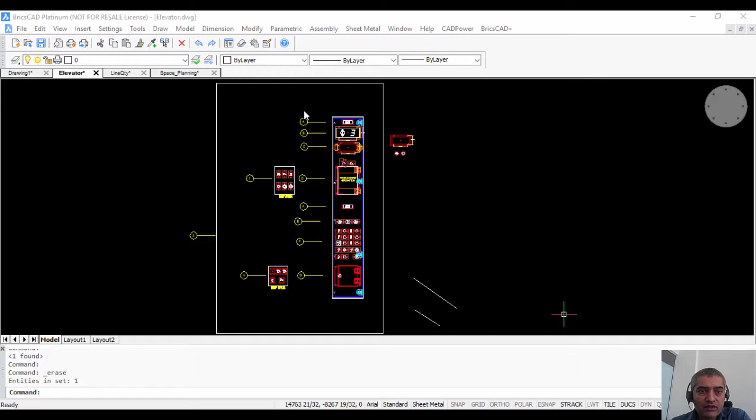In this CAD Power video, I'm going to give you a brief overview of the quantity takeoff tools in CAD Power. We are going to show you 3 drawings in which different workflows are presented. First, in this Elevator drawing, you can see there are a number of blocks, and we are going to create a cost and quantity table out of these blocks.

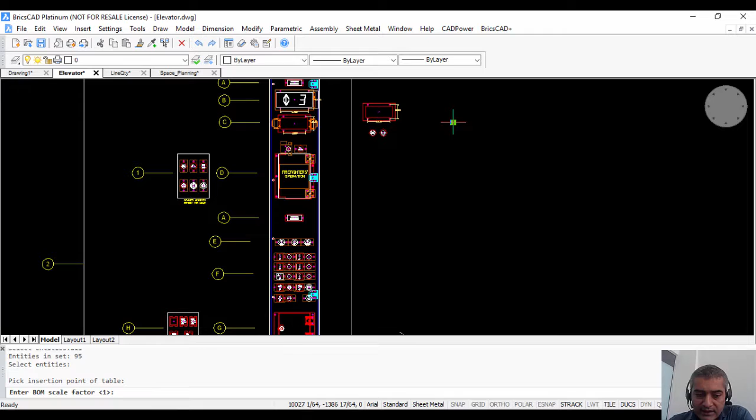So we go to CAD Power, BOM, BOM/BOQ tools, BOM generator. The BOQ type is already set as multiple blocks by name, and the block names have been set, the cost has been set. So I click OK, select all the blocks, pick a point for the BOQ table. I enter the scale as 25, and you can see that the BOQ table has been created now.

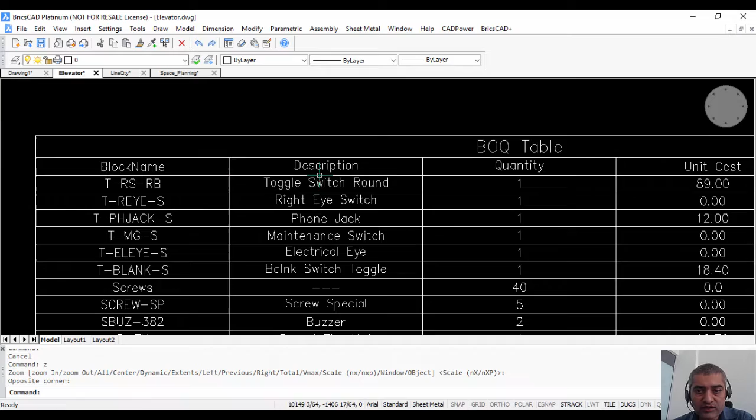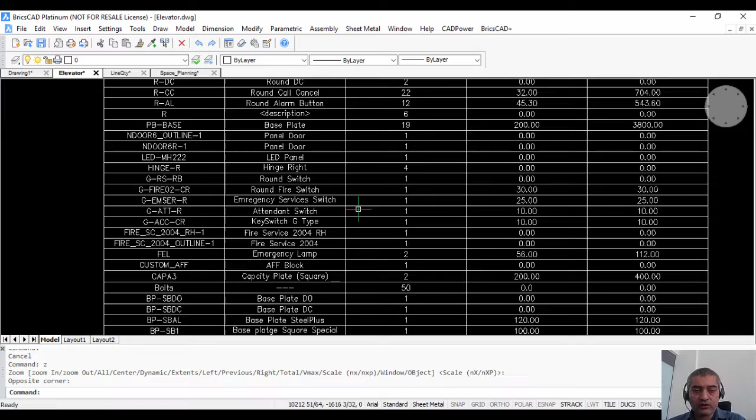So you can see that the BOQ table has got the block name, description, quantity, unit cost and total cost. So this is one way how you can create your quantity table from your CAD drawing. So you need to have blocks which have distinct identifiable names, and then you can set identifiable descriptions.

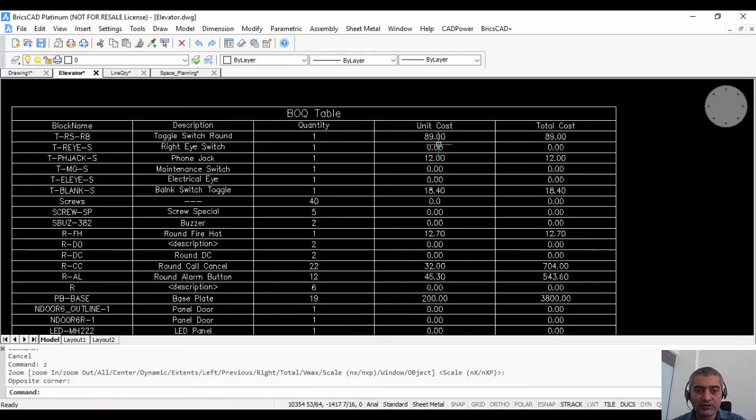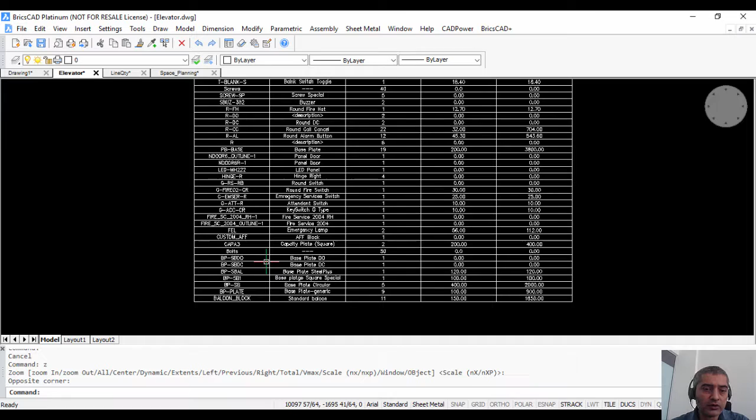You can set a cost for each block, and based on the number of insertions of the block, the total cost can be computed. It also supports the composite blocks, which means if you have an assembly which contains many blocks, you can define that as a composite block and have the complete accurate quantities generated.

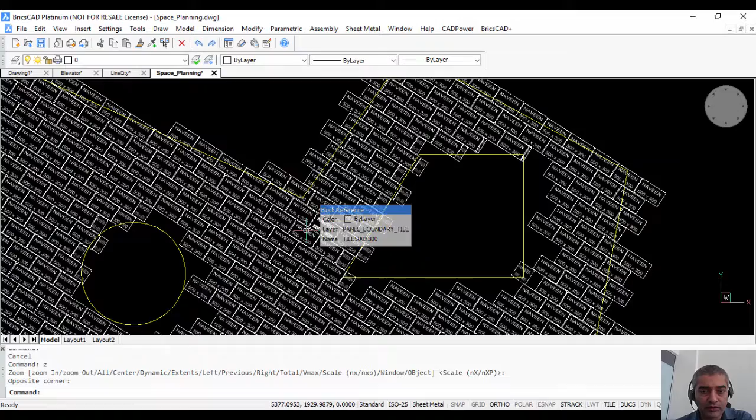In the next workflow, let us go to space planning. This is a drawing of an area which needs to be covered with tiles. So it's basically an architectural or construction related process. So we have defined the tile to be covered as a standard tile of 500 by 300, and the tile name is called tile 500 by 300. Once you cover this area with the tiles, it is easy to find the quantities.

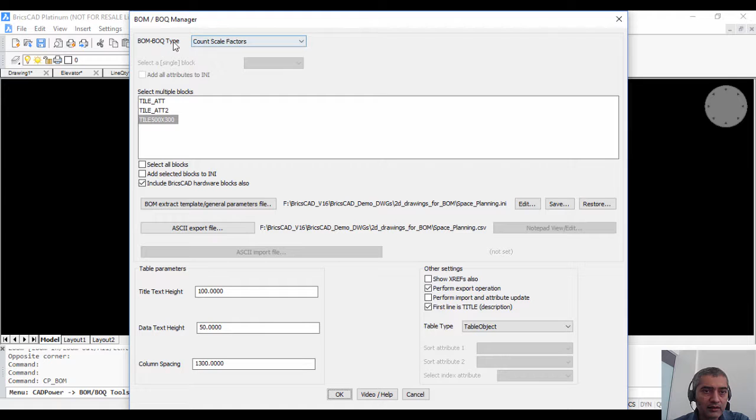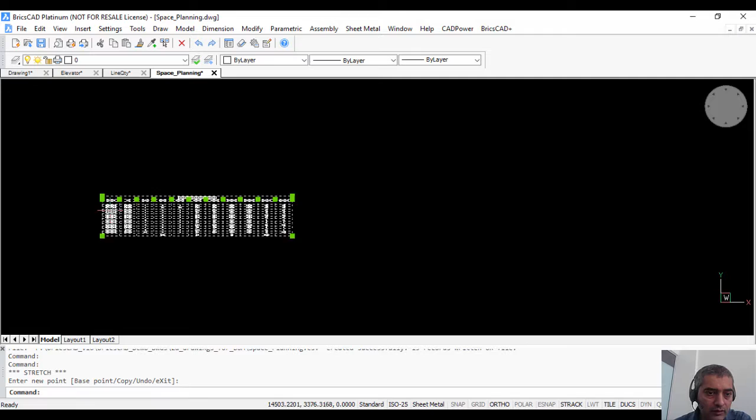We go to BOM/BOQ tools, BOM generator, and the count scale factors is the workflow here. Click OK, select all these tiles, pick a point, specify the scale as 5, and you can see that the quantity table is generated. So I'm going to scale it down, and you can see the details here.

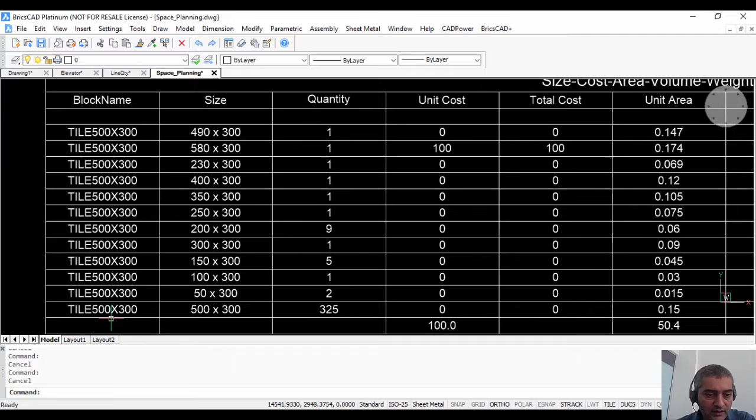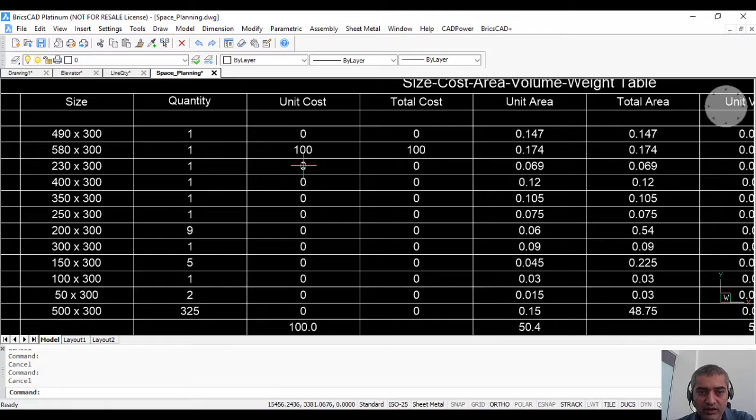The block name is the standard block name, and this block has been inserted at different scale factors. So you can see the different scale factors, and also you can see the quantities of each one of them. The standard size 500 by 300, there are 325 of them, and these are the other quantities. Cost has been set for some of the tiles, and you can see that when cost is set, you can get the total cost as well.

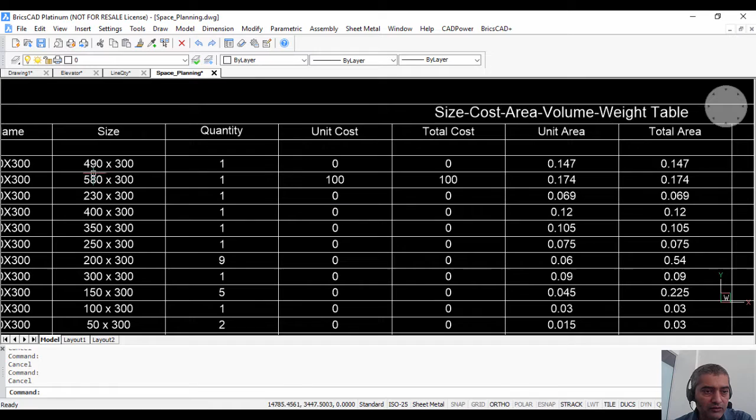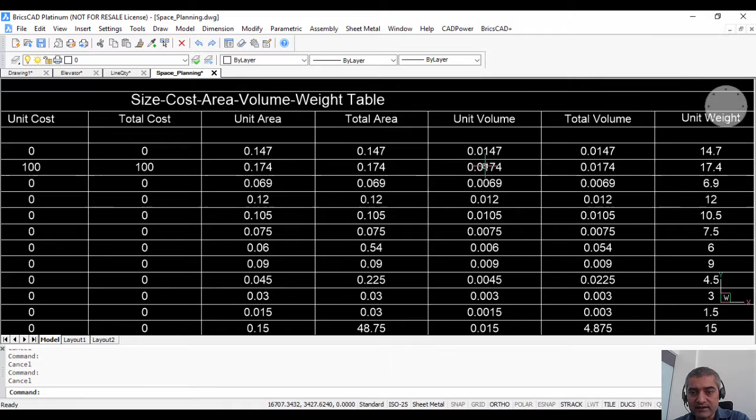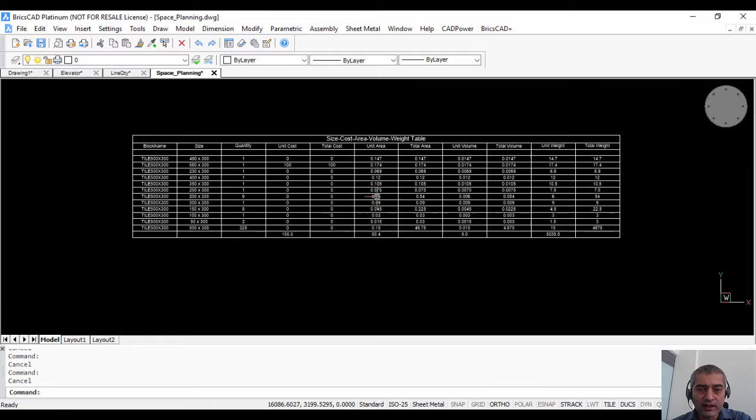Unit area also is computed. You can see that it is in square meter, because 490 by 300, this is millimeter. There has been a conversion in area units which is possible. You can also compute the total volume if you define the tile as a 3D tile, which is like a brick, or a hollow tile which has got a depth element to it, and from that you can calculate unit weight, total weight and the grand totals. So this is another workflow by which you can compute the quantities based on the scale factors.

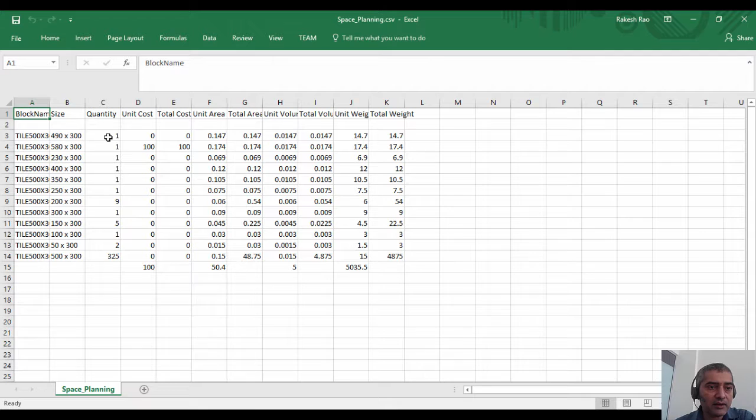Now if you go to the folder, you can also see that it would have generated an Excel file which you can open up and view, and all the information that you see in the drawing is available here in Excel as well. The last workflow that we want to present is called linear quantities.

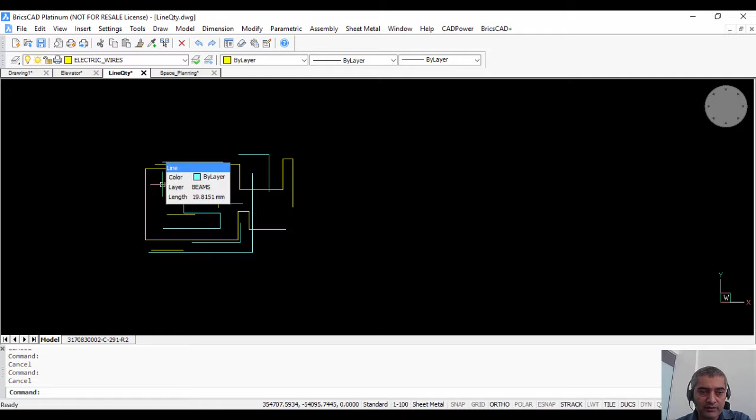So in linear quantities, we have linear elements like arcs, lines, polylines, splines and so on, and based on the length of the element you can compute cost or weight. So in this case you can see that the yellow lines are wires and the cyan lines are beams. So we have two linear elements, and we are going to compute the cost and the quantities. So these elements have already been tagged with the data, which you can check from entity data.

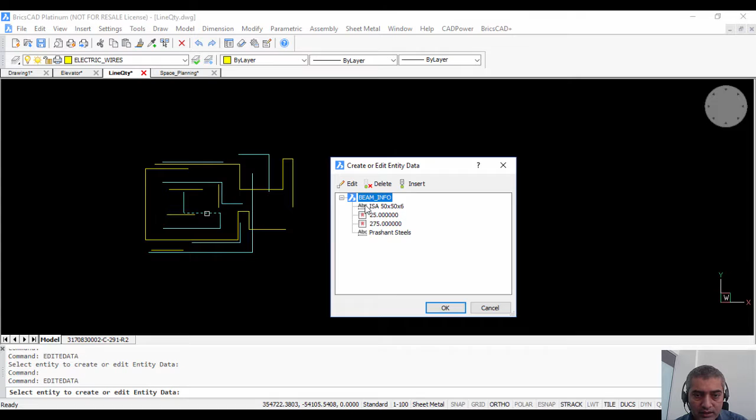So you can see that this is a wire which is of type PVC sheathed. It's got a cost of 475 per unit length and a weight of 12.5 per unit length, and the manufacturer is Suguna. And in this case it's a beam. You can see that the beam notation, the cost and weight per unit length are mentioned here, and the manufacturer as well. So once you have this information tagged in, you can generate the linear quantities, which is compute linear quantities.

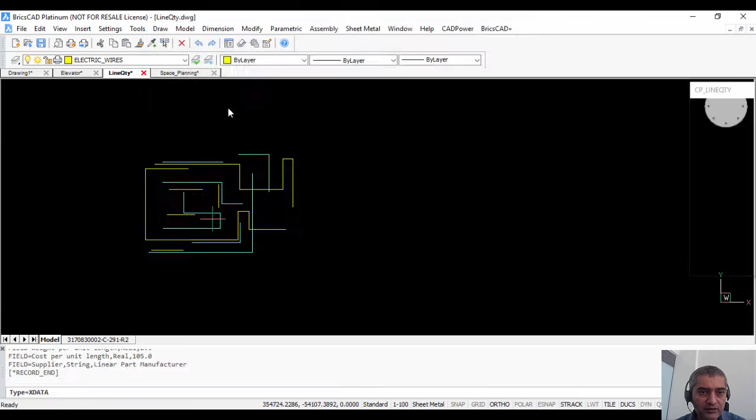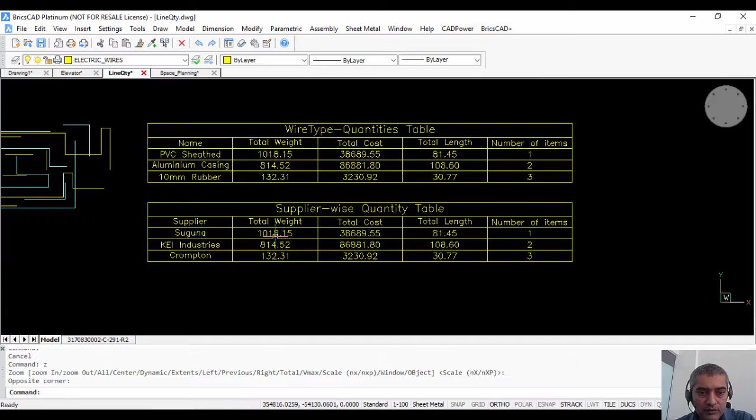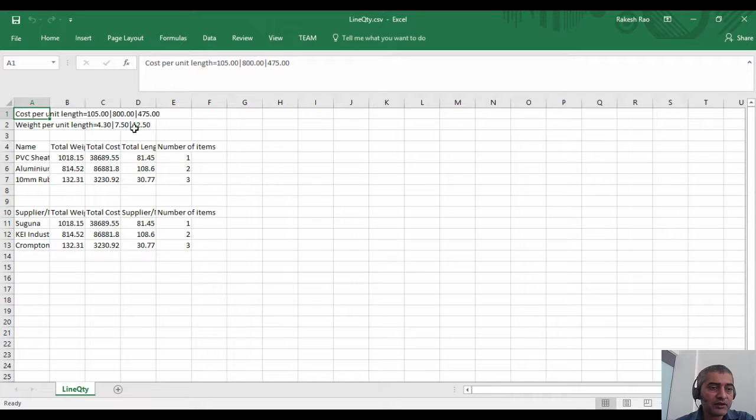So we select the wires first, so go to wire info, select all of it. So you have the quantity table based on the material type, and you have the quantity table based on the supplier. You get total weight, total cost, total length, and the number of items in each one of them. This is exported to a CSV file as well, which can be directly imported to Excel for further computations as necessary. These tools work identically in AutoCAD as well.